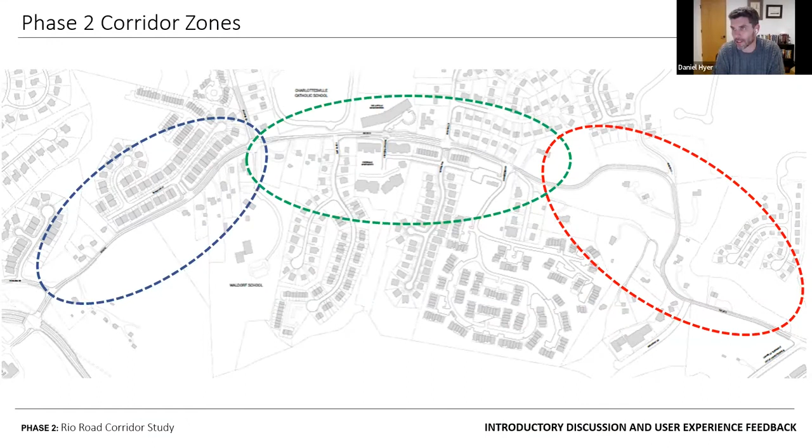So we've basically broken phase two into three zones: north, central, and south. And within each of those zones, there's going to be different things that we're observing, different things we're interested in, and different things we don't know yet. So we're going to want to hear from you.

Along the north, at least what we're aware of right now is that there's projects that have been recently developed, which are changing the character of the corridor. And there's projects intended to happen soon, which will affect the character of the corridor.

In the central region, that's the green oval in the middle, that area is largely developed. There have been some recent developments like the loft apartment right there next to the Catholic school. But still there's room for some improvements in there from a roadway corridor standpoint.

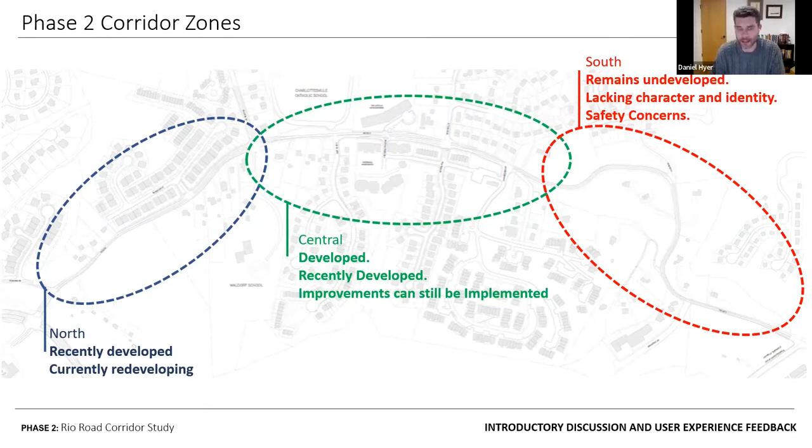And then the southern zone is very interesting and very starkly different than the other two. It remains largely undeveloped, still has a lot of remnants of an older rural road. It's hard to say that it has a lot of character to it. It kind of seems like this forgotten stretch between where the county starts and the city starts. And certainly there's some safety concerns in that area as well.

So some of the questions we'll revisit in a little more detail in a few moments are guiding questions. These are not exclusive, we can listen to feedback about anything you want to share. But within the north section, we're curious to hear from you, the CAC, and the citizens of the area: how can this phase two study influence and guide some of the frontage conditions of these developments coming in the near term? What would you like to see there? What is needed from your perspective?

In the central zone, we're curious to hear from you specifically what amenities you think are missing along that portion of the corridor, or are there safety improvements needed in that portion of the corridor?

And then along the southern portion: how do you use this portion of the road? How do you see this portion of the road needing to be used? And what would you like to see in that area of the road?

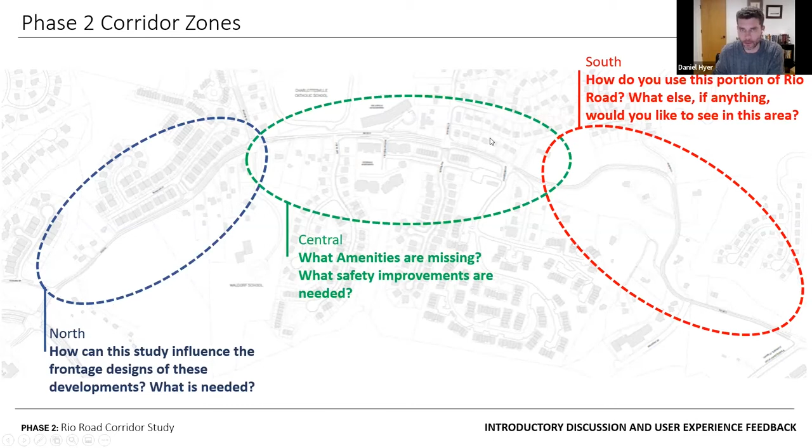Here's a few context images to help us all be on the same page about how we're describing things. This is an aerial image of the northern portion of phase two Rio Road, with what will be the Rio Pointe development on the left. This portion of the roadway we've characterized as a neighborhood collector street. It still has a little bit of rural character left, but that probably won't be the case for much longer.

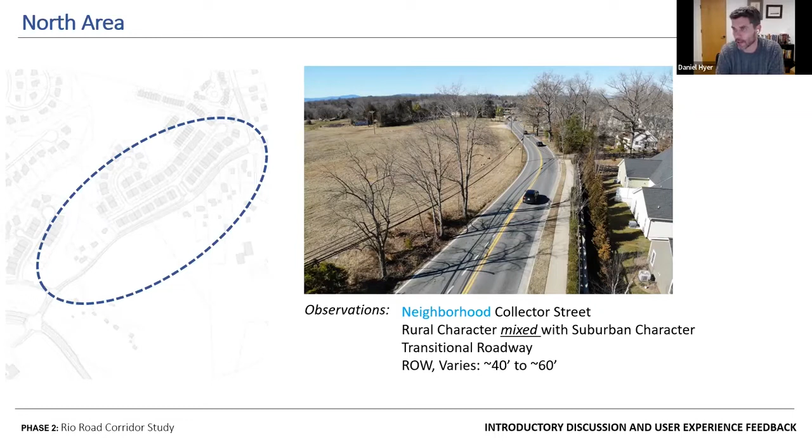And the right-of-way is relatively constrained between 40 and 60 feet. This is a part of the roadway that's really transitioning toward Rio Road from phase one, where it's starkly different visually and characteristically with its four-lane divided highway.

Here's an aerial image of the central portion of phase two, the central zone, which we're still characterizing largely as a neighborhood collector street. But the right-of-way has gotten much broader here, maybe overly broad, to be honest. It's quite broad in front of the loft apartments. And strangely, there's a little bit of an urban context with these buildings and their frontage conditions, so that's definitely a noticeable difference. But there are sidewalks with buffer strips, which is great.

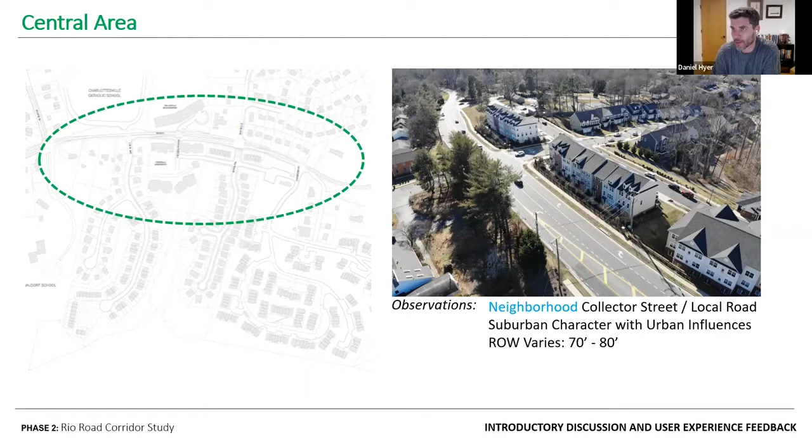And here's an image of the southern zone. As you all know, this is a very tricky part of the corridor to really define in any context. It's a twisting, turning road that feels like it could be unsafe. There's no pedestrian amenities, the right-of-way varies, and the topography is tricky.

So this is an area we're going to be very keen to hear from you about, but also to see what opportunities are available.

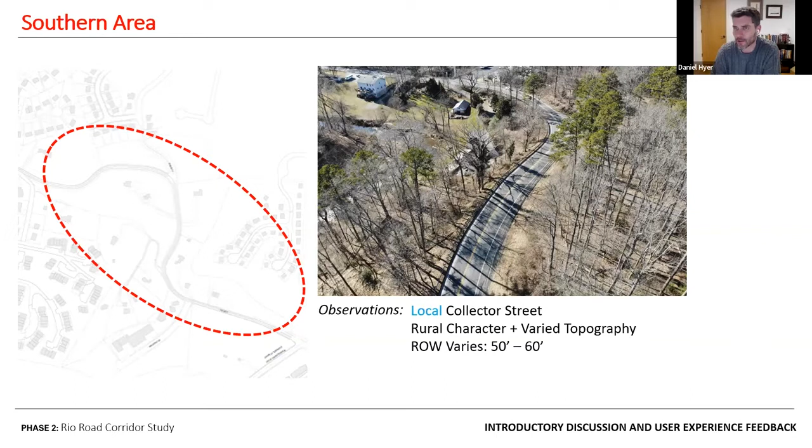Here's a quick breakdown of what we know is happening and what we're currently aware of. If you see something missing, please let us know. Obviously, the left side of your screen, that's the John Warner Parkway. And on the right side of your screen, that's the city jurisdictional boundary. So we're going to move from left to right.

The John Warner Parkway Rio Road intersection is a known project that will happen soon. Number two, there's a county sidewalk project happening currently where they're improving some pedestrian facilities along Rio Road in that area. Three, the Rio Pointe development and the zoning map amendment, which when I wrote this was pending. It's no longer pending, as I understand, so there's a project happening there.

Four, the Rio Commons development. Again, I think that's a by-right development, so that's happening also soon. Five, there was a roundabout study done in the past of Penn Park Road at Waldorf School, a small roundabout study conducted there, which we'll lean on to learn a little bit about what they know from that study.

Number 6, there's a county sidewalk project just south of Penn Park Road. Number 7, there was an intersection study done at Penfield Lane or Penn Park Lane, and that's another data set we're going to lean on and learn from. And 8, although I have no understanding of when or what will happen with Ecovillage, it's certainly something I've heard a lot of talk about and seen a sign up for years. I imagine at some point something will happen there. So there is stuff happening on this portion of the corridor.

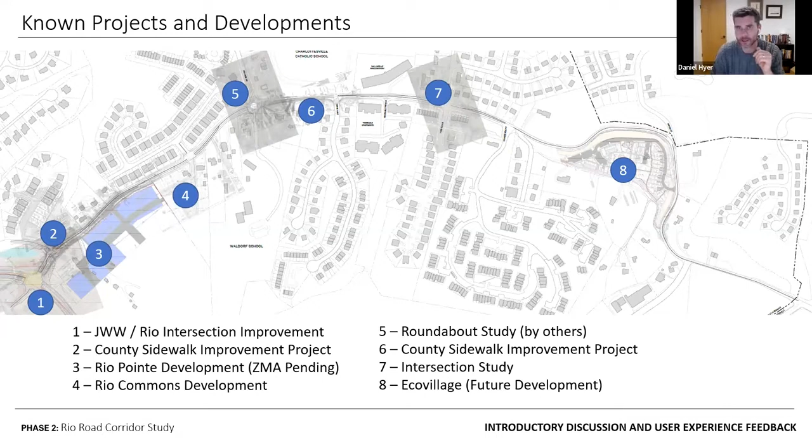Our hope is that you can help us color in the lines so we can understand more about these things. So I'm going to stop talking for the moment, and I can talk more if you want, but really I want to open the floor to the CAC members, or even citizens who are joining. We'd love to learn what you know, and hear from you about your experiences, about what's missing and what you'd like to see, so that as we get into phase 2, we can be equipped with as many experiential data points as we can. I'm going to give it back to you, Lee, and let you help guide folks answering questions and sharing their insights. We'll be taking notes and listening.

Okay, any comments so far from anybody?

Judy. You're muted, Judy. Still can't hear you. Well, I guess while... Okay, Judy, can I hear you? Oh, she's still working on it. No, not happening. In the interest of time, how about we go to Audrey?